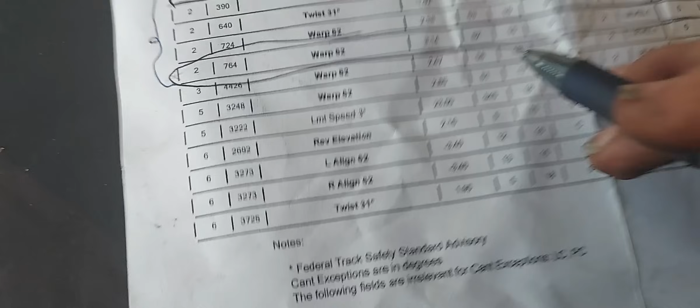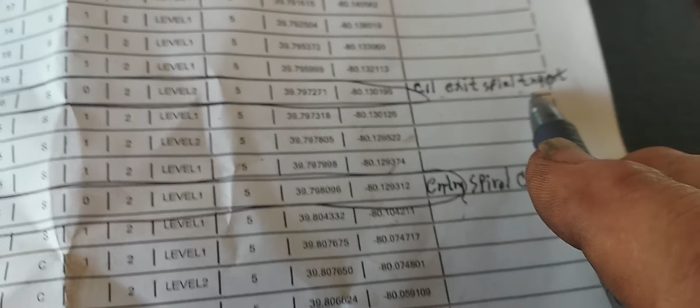I'll put it on, but this is curve 11, and this was the worst of it. I got the entry spiral tamped, show you that in a minute, and the exit spiral, the tangent, like I just showed you, that's done.

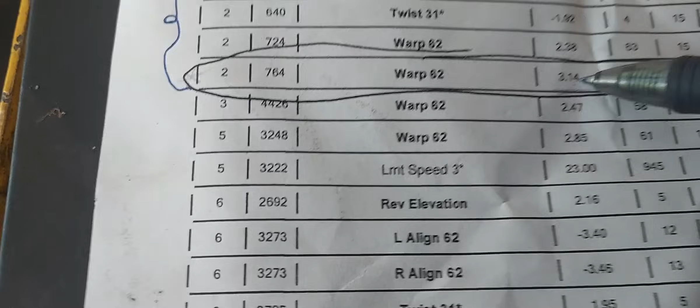So all of this here is done. I said this was the worst part, on the other side of the curve right here. So I got it looking pretty good. And we got to head down track, clear up for a train. Okay.

So yeah, this is the entry spiral headed west, and looks pretty good right now. This rail over here was down too much, and right here coming out of the curve, right in here, the cross level was a little bit off. So I got it pretty good right now. Got that done, got that marked off the list.

We're good to go. All right, I'm out of here. I'll be back. I got to scoot because there's about 8 cars left to load, so I got to scoot.

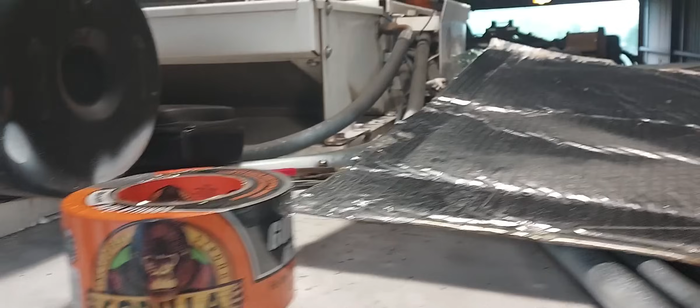Okay, we're on top of my tamper here. A couple weeks ago I painted the cab roof white. Well, that was all right, and insulated the cab inside. But the guy said the metal's still getting hot outside and you need to insulate it. So that's what I'm going to do here today.

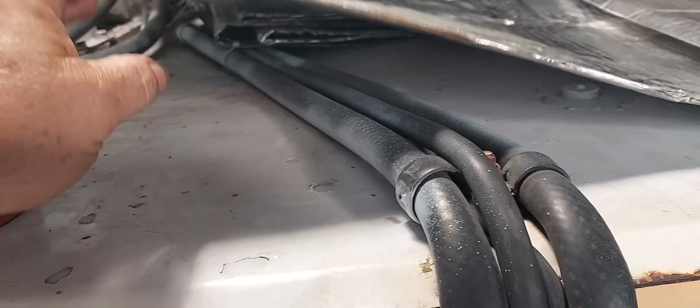I got this stuff here. It's not real thick, but it's what I got.

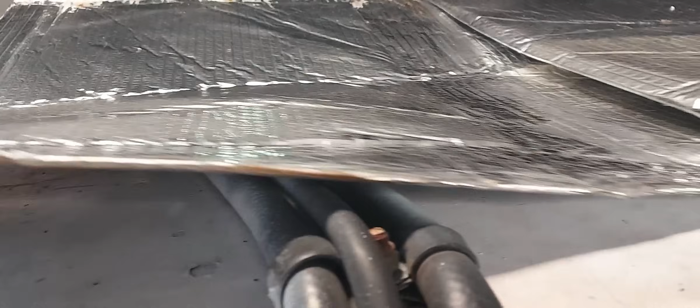We had a jacuzzi at the house, and it was over 20 years old, so Mom wanted it out of there. Corey and I tore the jacuzzi apart, and there will be a video of that on my second channel, Dave's Other Doings, at some point. But once we took the covering off of the jacuzzi, this was around there. I said, well, we're not going to throw this away. I'm going to put it up here and see what happens.

Okay, and we're going to tape it down with this. I tried a test strip with this, stuck it to this, and I can't get it off. So this is good stuff.

Anyway, the only thing I don't know is what's going to happen when it rains, but this didn't cost me anything. It's 15 bucks for the Gorilla tape. All right, that's where we're at this morning. See what we can do. I don't know if I have enough or not. We'll find out. Whatever I got, that's what I'm going to use.

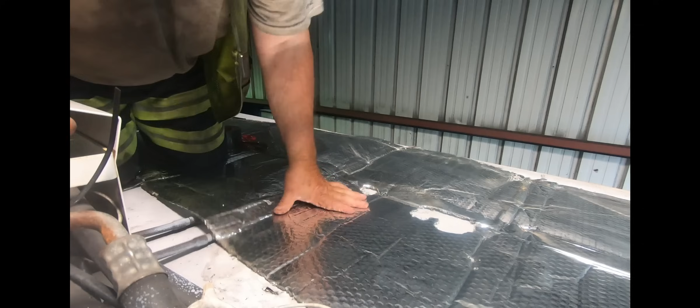All right, this is tough stuff.

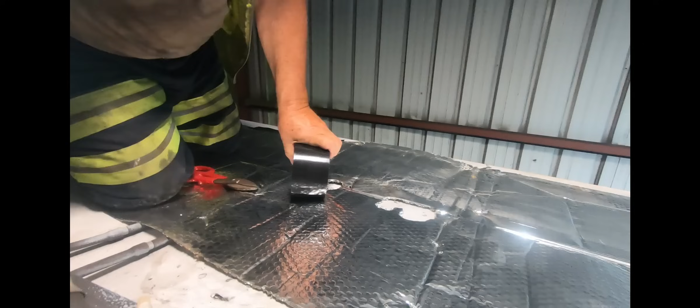Doing pretty good so far. Running out of material.

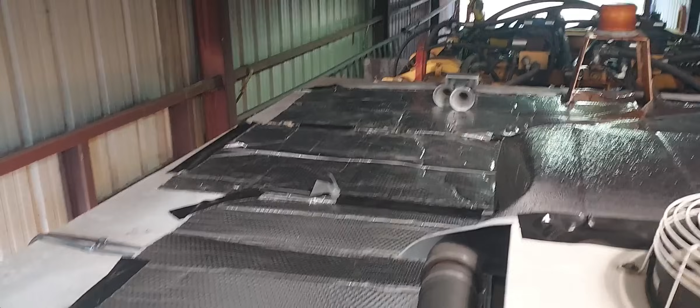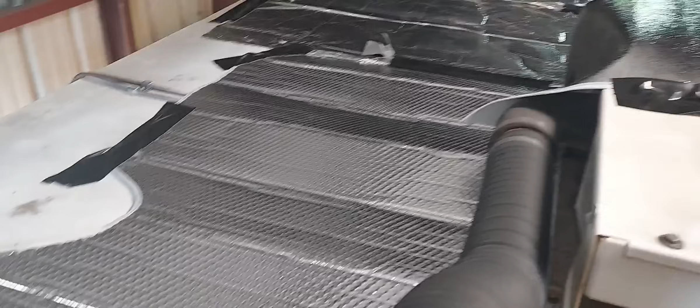That's the material I had to work with. I had to buy a couple more of the windshield shades last week, so I bought 2 of those and used those up. Wish I had enough of that other stuff, but I didn't. It's about the same, it's just got these little round hole things there for your windshield or your mirror, but we'll see what happens. It can't do any more harm than what it does.

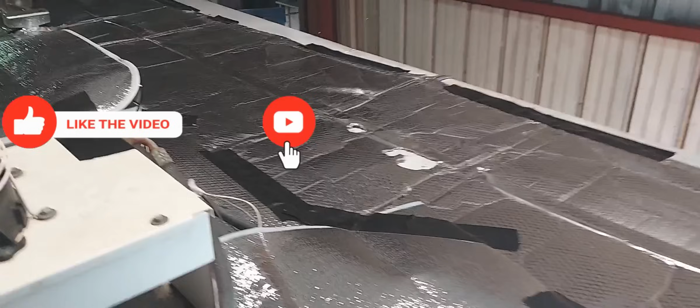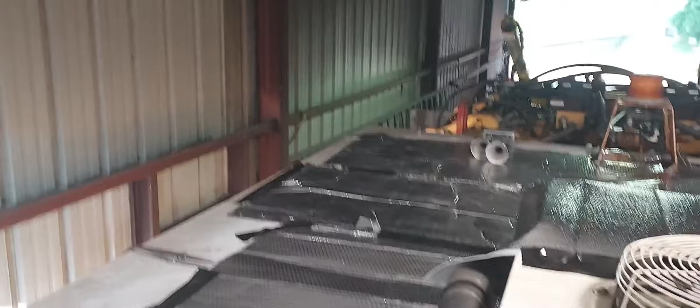It's got to help some. So that's that. And I'm bringing Corey over on one of my days off, and we're going to put tint on the big windows. That takes 4 hands to do, so she can help me put the tint on the big windows. I've got some on the smaller windows already, but she's going to help me do the big ones on one of my days off.

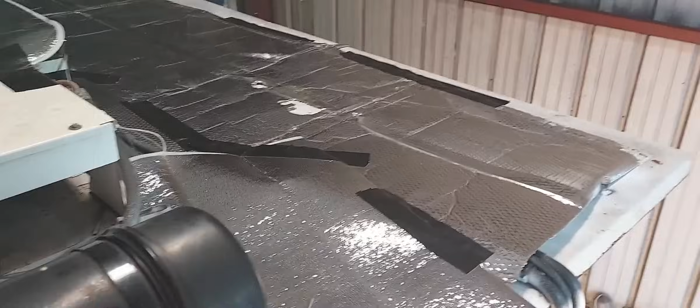Well, look what came in. Got a load of spikes, a tractor trailer load of spikes, and some joint bars. We're going to be putting in over 2,000 ties here during our vacation shutdown.

Pretty cool, huh? Got to have a lot of it. We always use new spikes, new spikes, never reuse the old spikes. Nice.

Okay, we'll see what happens. There's going to be some oil coming out. I got a valve up above, I shut it off. Let me get this out of the way. This is off the brand new valve. This block and the brand new block are exactly the same. So we'll see what happens.

It's a 1 inch. Okay, not much of what came out. That's great. Awesome, awesome, awesome. Wonderful, wonderful, wonderful. Hopefully this works.

I think that's what's sticking. It hit a joint yesterday, and the jack beam came off the joint. The jack beam hit the joint. Tried to clamp it with the clamps, and then it came up in the air, and it didn't want to go back down.

Well, I got bigger problems now. It's a hydraulic leak here somewhere. Looks like it's in that valve body up there. Anyway, the jack beam won't come down on its own when I want it to. I don't know, I can't see up in there to see real good.

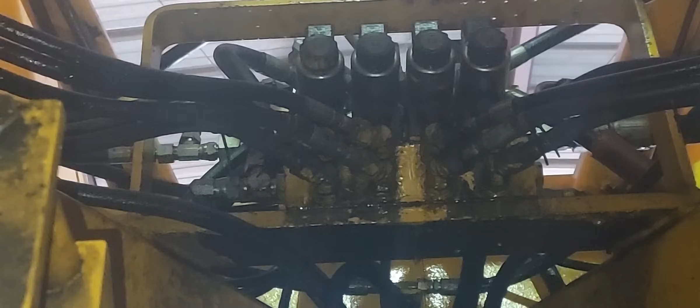If I can zoom in... Wow. Just exactly what I did not want to do today. Well, that's the valve body that something is leaking from. Thought I'd try to get up here and see if I could get a better view of it.

Tomorrow's July 4th. They got a lot of people, mechanics off. The dockman is off today. A barge loader is off today. So the available people that they got, other than me and my buddy, is down over the hill loading barges. Anyway, pulled the regulator out this morning, started right up. They put it on the side track over here, and now it won't start. How about that? So my buddy's dealing with that, and I'm dealing with this.

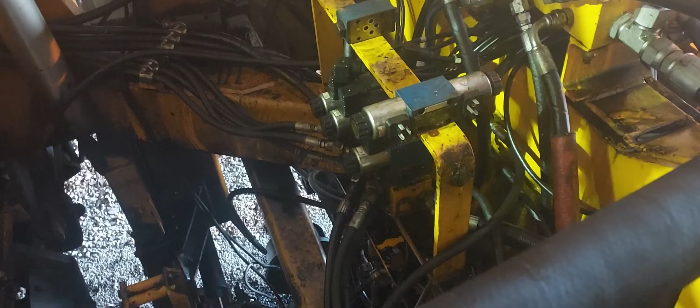Well, this has been a very frustrating day. That right there, that block goes underneath it, and that all bolts to that manifold down there. Anyway, the good news is I got curve 36 and curve 11 done, and those were our two major problems on the track. The rest of the geometry report is not that bad, the track's in pretty decent shape. Those two major things were taken care of this week.

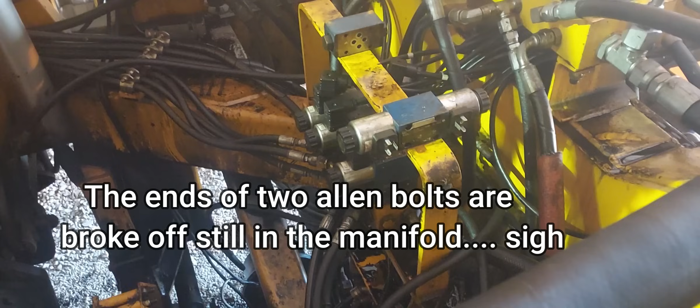Called a mechanic out early, and he came and took this apart. The bad news is there's 4 Allen screws that go down through those holes, through that block, into the manifold down below. One of the screws he pulled right up out with his hand, it was broke off. The other screw was really loose, and when he got it out, it wasn't holding anything. The other 2 were holding it. However, there was an O-ring in there that went bad. So we've got 1 screw at least, maybe 2 - I'm not sure about that, but at least 1 down into that block, and possibly 2.

Anyway, so at least they got right on it, found the leak, but whether we are able to get a new block, I don't know. I guess we're going to have to try to get those screws up out of there, because let me show you the real quandary that we have right now with this. At least we found out what is wrong.

You see how those solenoids are made? Okay, these are my work heads. And those 4 solenoids in there, valves - the manifold controls the in and out of all 4 of my work heads. So that's what swings these in, out, and in.

Now, here's the problem. Let me show you this first. See that down there, that long cylinder? That is what moves the jack beam ahead and back. That's called a skew cylinder, S-K-E-W. And there's 2 blocks on here with 2 solenoids that control both of those too. But...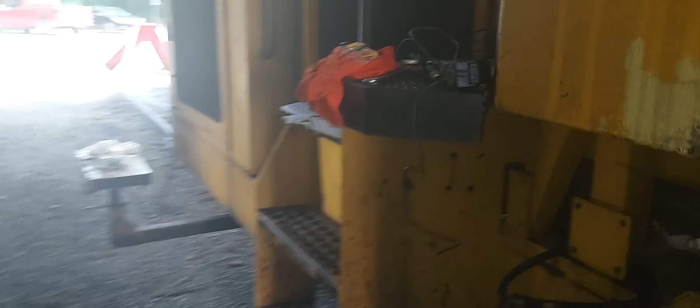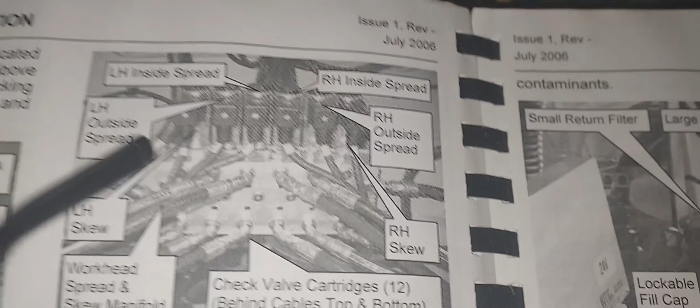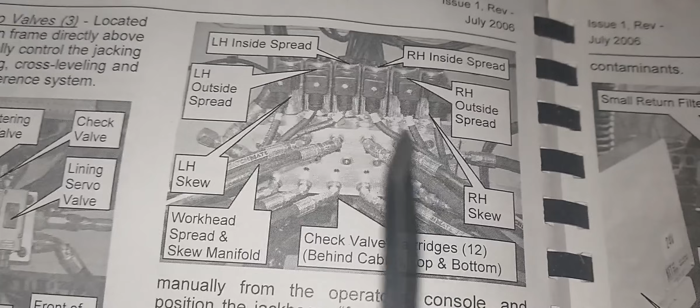Let's look down here. This machine was rebuilt by a company called Kanza in 2009, all right. They changed a lot of things. Yeah, Kanza is no longer in business. This was the original design from Jackson, and you see there's 6. The skews are on the outside. Those are no longer on the block, the manifold block that we have - it's a completely different block, a completely different type of solenoid.

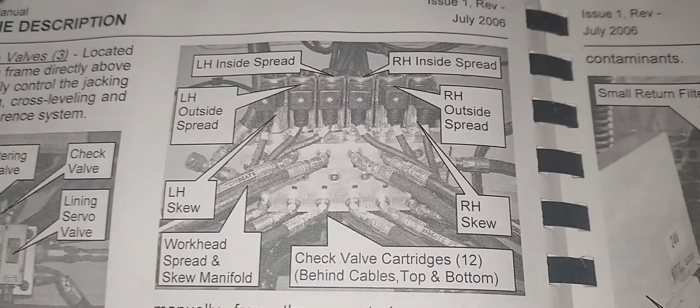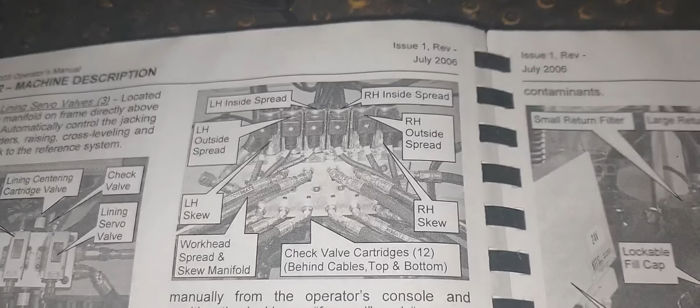Okay, so we've got these 4 on the block that we have, but it's a different block. So if we go to order parts, this is the block that Harsco is going to have in stock. Who knows whether that block, that Kanza put on there, is a homemade design. The solenoids are obviously different - our solenoids will not bolt up to that block, the solenoids that we have. So this is a real quandary.

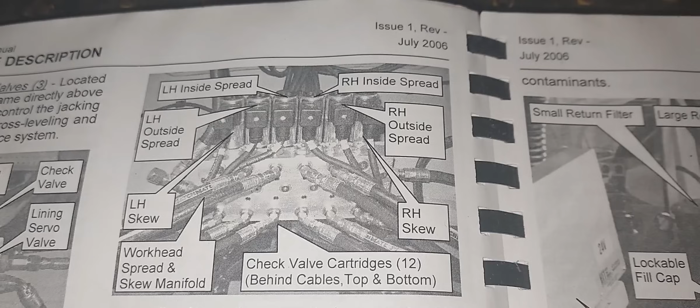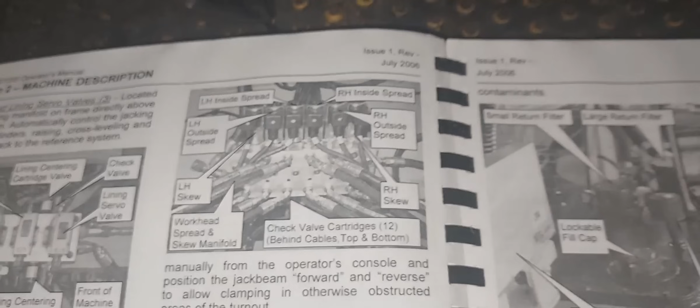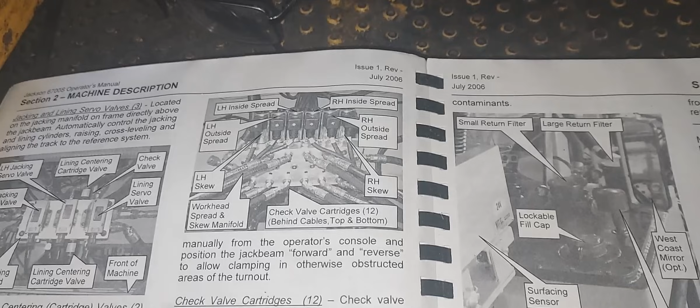Said... Kanza's no longer in business, so we can't call them. I don't know what we're going to do now. And believe me, I would much rather be out there tamping - believe me, believe me, believe me. That's what I wanted to do today and tomorrow. This is not a quick fix, so they're going to have to try to get those screws out of there. They have to try it. Wish them luck on that.

Well, also, it's after 2 here, and I have been nonstop all day long since 5 after 7. I'm getting tired. I'm ready to go home and take a nap with Freddie.

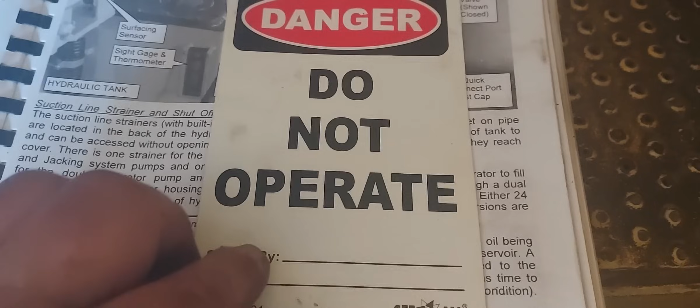Anyway, I am going to put a danger tag on this machine. Do not operate it. I will sign it and date it once I get off here. That means, under mine safety rules, no one at all is allowed to start this machine until I take this tag off, okay? So I'll make sure nobody starts it, moves it, and oil goes everywhere.

That's a very frustrating day this has been for me. They did get the regulator to start. They hit the Bendix on the starter motor with a hammer, and it started right up. How about that, old farmer's trick. I know a lot of farmers that have hit their starters on their tractors to get them started.

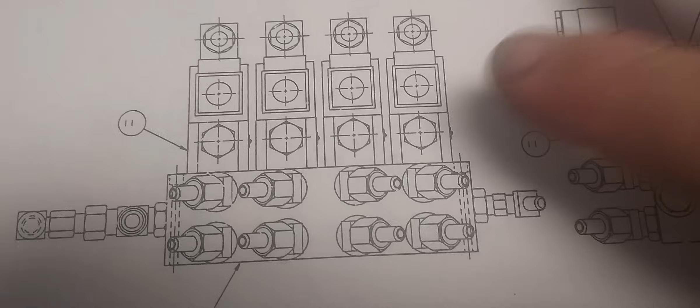So a new Bendix has been ordered from what I am told. Well, this is good news. This is the parts book, and in the parts book it's got the 4 instead of the 6, like the operator's manual has. So this manifold here doesn't have the skew for the skew cylinders on the outside. That's good, that's good.

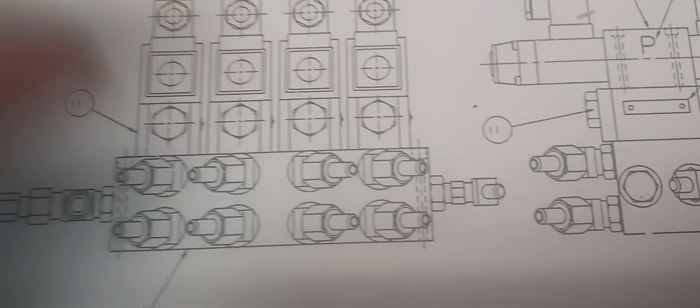So you get a better picture of it. Let's say one of these bolts here was broke - the other one is broke off down inside this manifold. Well, it's this one here, so it's down inside this manifold block, it's broke off. I don't know if we're going to order one or try to get a mechanic to drill and tap that and extract that other screw. There's your part number, 156702, how about that. We'll see what happens, but that's good news. If they do order one, it'll be the right one.

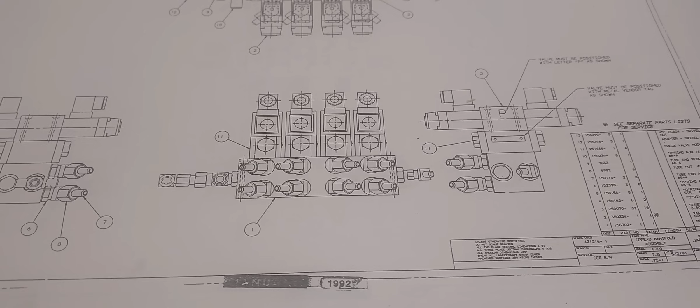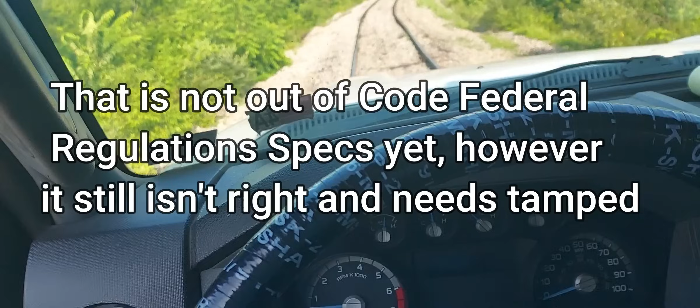All right, so when this gets picked up, a good bit of this will get lined back into place because the track is going to pull that way. So when I pick the track up, it's going to set it back at the right super elevation, and that'll help push that out a little bit. But anyway, with that said, this is my geometry report. Let's see right here, you see we have reverse elevation, that's that spot right there.

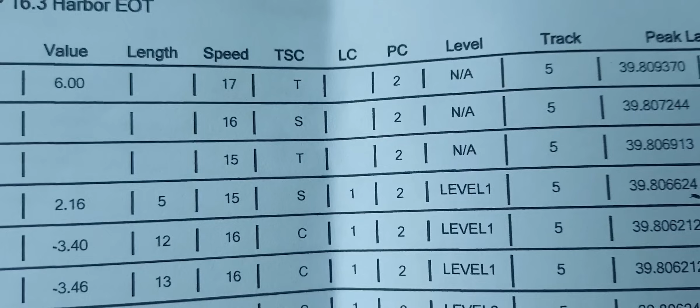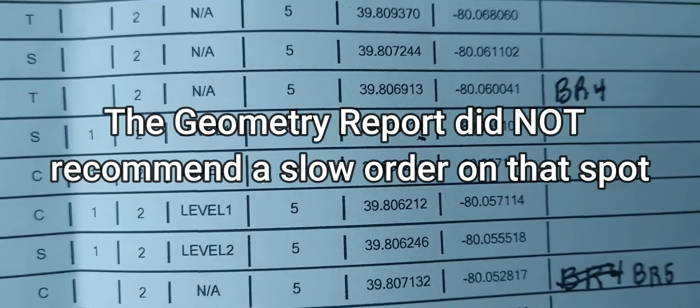Okay, so that will be my next project when my tamper gets fixed, to go up there and do that. There's the coordinates on it, and that's bridge 4, and bridge 4 is right ahead of us. But got a couple other spots here on curve 28 that also need fixed up.

Okay, I wanted to show you that. Alrighty, it's going to be a good day. They're running coal, and the prep plant is doing fantastic. Actually, they're up to 1,000 ton an hour this morning when I left. That's awesome, I don't know, they did something right.

Okay, I'm glad to get down here and see this. They've ran trains over it all week since Monday, and the train operators are very, very happy - very happy. They say it rides really good, and that's great to hear. And I can see this is holding up real good right through here, so I'm happy about that.

Wonderful, okay, and the regulator is running today. He's actually up on the other side of bridge 2, right in here over top of us, where I pulled that track over 14 inches, started right down here at that joint. But yeah, they're going to replace some rail up on curve 14 during our vacation shutdown. So he's up there brooming, regulator's running good today. Trains are running, prep plant's running, they're loading barges, how about that, that's pretty good.